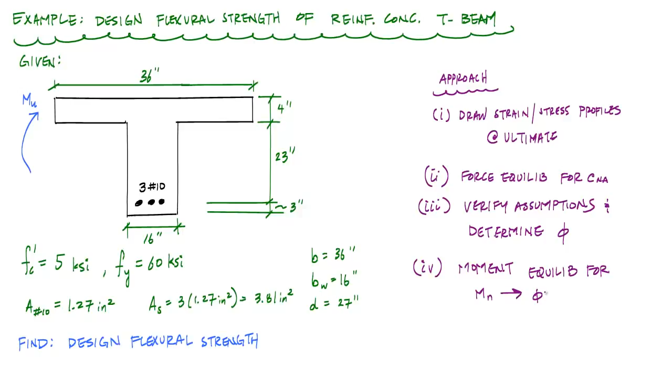So the first thing that we want to do is draw the strain and stress profiles at ultimate for the reinforced concrete section. For the T-beam, I've redrawn it right here. I like to draw horizontal lines for the top and the bottom, and these vertical lines here. The first vertical line will represent my strain profile, and the second one will be my stress slash force profile.

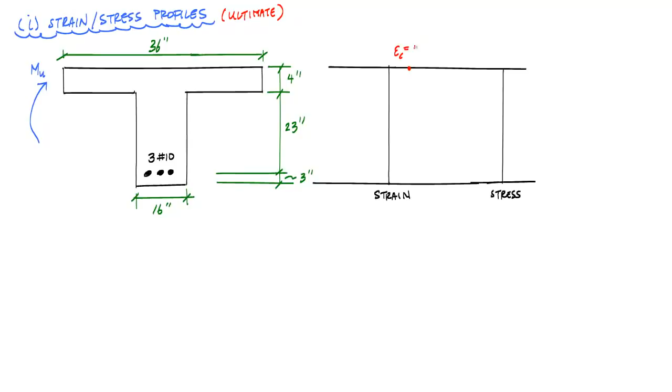But the thing to remember is that you are drawing this strain and stress profile at ultimate. This word ultimate implies a specific strain value for the compressive strain. In this case, the concrete is crushing, which means the compressive strain in concrete reaches the ultimate compressive strain. If you're using the American Concrete Institute standard, this is 0.003 in compression.

Here I will have a linear strain profile, and that linear strain profile is always true. When we draw this line out for the strain profile, we're going to assume for now that the neutral axis, more like the depth of the equivalent stress block that we're going to use for the stress profile, is within the flange. And here's what the strain profile might look like.

Where it's equal to 0 is where my neutral axis location is. This would be c, and my steel strain would be here, epsilon s. This would be my strain in the tensile steel right here, and that's something that we need to figure out.

And the stress profile looks like this. If we're using the equivalent stress block, or the Whitney stress block, I'm going to have a stress block that goes here, down to a distance a, here, and here.

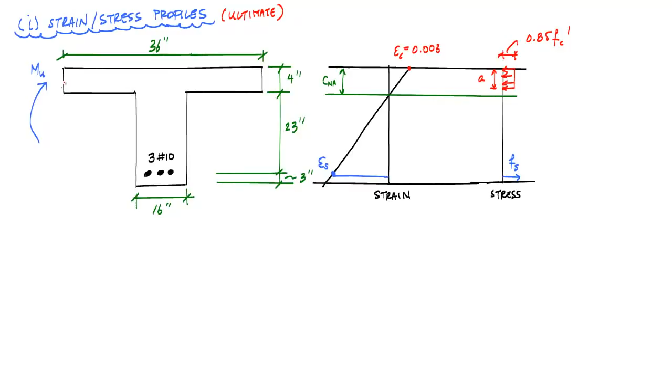This has a stress intensity of 0.85 f'c, and my steel, represented by the layer of steel location here, will have a stress over here of fs. And you know what this depth a means, the depth of the equivalent stress block: my neutral axis is shallow enough that my equivalent stress block depth stays within the flange region right here. And so this, I'm assuming right now, is my area in compression.

This has a resultant force, I'll call that Cc, and the steel has a resultant force, I'll call that Ts, in tension here. And there will be a centroid of this compression block, which will be this distance here, we'll call that y-bar, and the distance between the tension and the compression forces, the couple, I'll call z. That's just another symbol for the arm right there. And really this comes out to d minus y-bar.

I would like to emphasize to you that this drawing assumes that the depth of the equivalent stress block a is less than the height of the flange of 4 inches, and so we have this nice rectangular compression zone. If this turns out to be not true, we're going to have to redo the formulation and probably modify this drawing a little bit to reflect what's really going on.

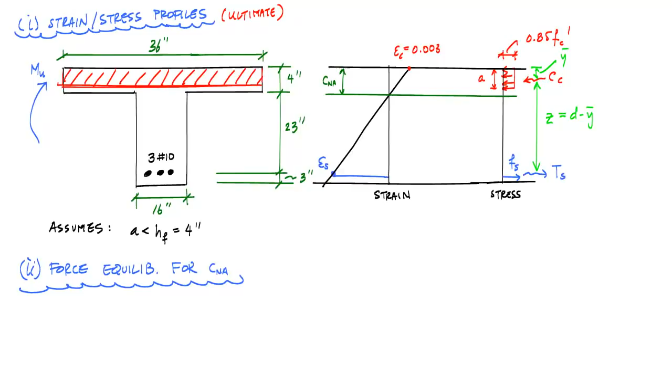So the next thing I want to do is utilize my force equilibrium equation to determine the neutral axis depth, c and a. The way I'm going to do that is take the sum of the horizontal forces equal to 0, and that tells me that Ts is equal to Cc. And if I assume that the strain in my tension steel has yielded, I can substitute and have that Ts, As fy, is equal to 0.85 times f'c times the area in compression.

And so here I can solve for the area in compression, which is going to be equal to As fy over 0.85 f'c. If I substitute some numbers, that's 3.81 inches squared times 60 ksi divided by 0.85 times 5 ksi. And that tells me that the area in compression is 53.788 inches squared.

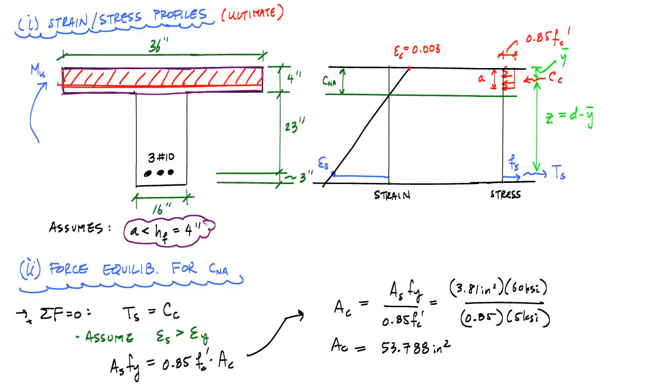As long as this area in compression that I need is less than the area of the flange, which I'll put in purple here, the geometry of the flange of this T-beam, then this assumption is true. If I calculate the area of the flange, that would be 36 times 4 inches, which is 144 inches squared. That means Ac is less than A flange, so my area in compression is this red zone. It still stays as a rectangular block.

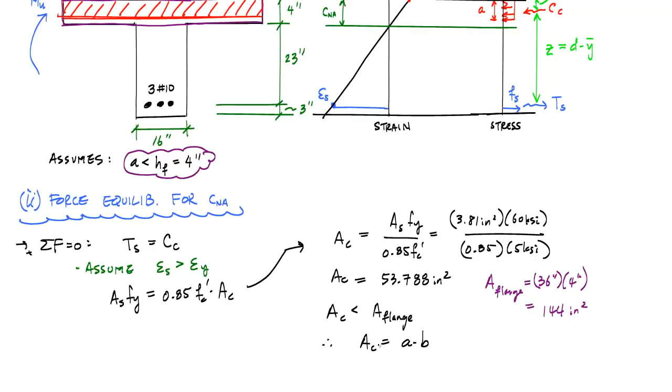And so I can say, because the area of compression is less than the area of the flange, the area in compression Ac is equal to a times b, where a is the depth of the Whitney stress block and b is the width of the flange. And I can solve for a directly now. Let me scroll down a little bit. a is equal to Ac divided by b, which is 53.788 inches squared divided by the flange width of 36 inches, and that tells me a, the depth of the equivalent stress block, is

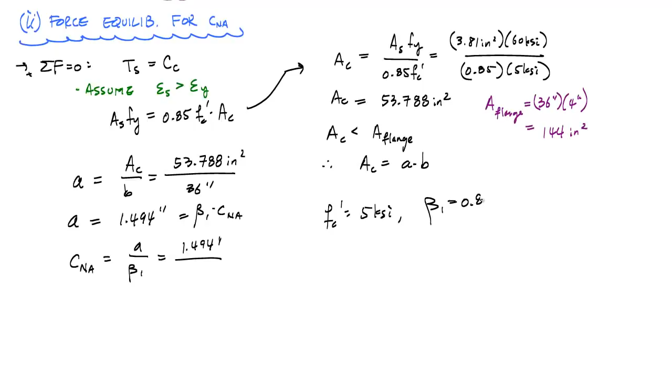1.494 inches. And then I can back calculate, because I know a is equal to beta 1 times c_NA. I can solve for c_NA, the neutral axis depth, which is a over beta 1, so 1.494 inches divided by beta 1. In this case, because f'c is equal to 5 ksi, beta 1 is equal to 0.80. And this gives me a neutral axis depth of 1.868 inches. Now the next thing I want to do is verify my assumptions.

I went ahead and I verified that the depth of the equivalent stress block is less than this 4 inches, which was the height of the flange. But I have this other assumption here that I have yet to verify, and that's the tension steel has yielded.

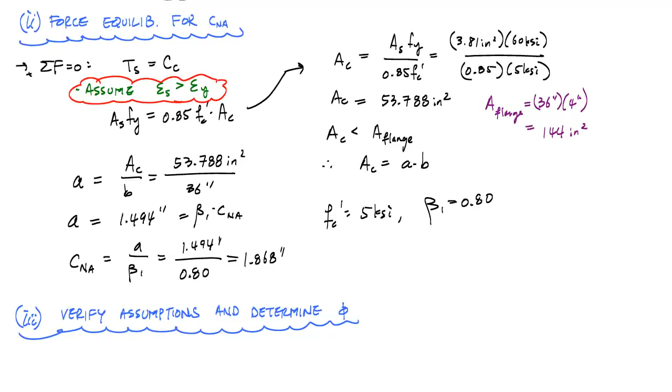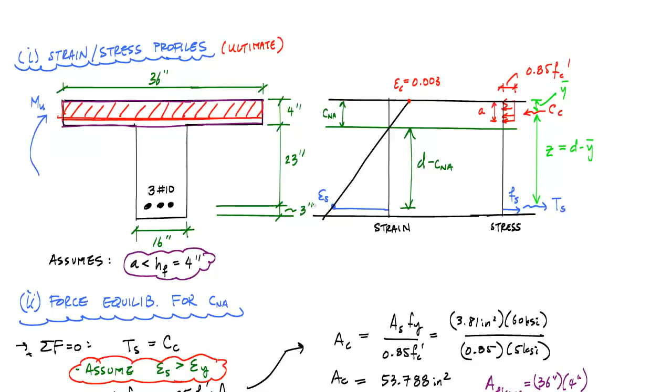And so in order for me to do that, I can just go ahead and use similar triangles from the strain profile, which if you look over here, to calculate the strain right here, I would just have that this distance right here is d minus CNA. And by using similar triangles, I can come up with a relationship for the strain here as a function of the geometry and the strain in compression.

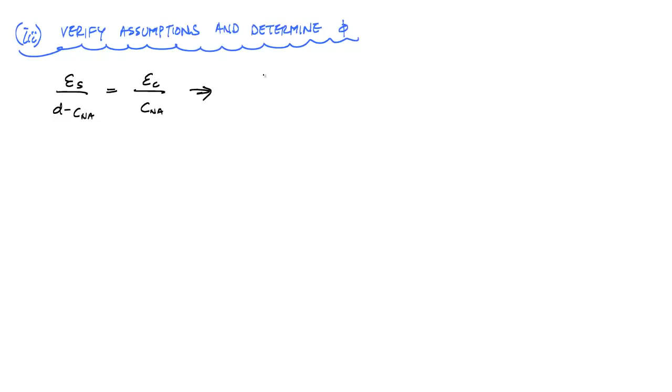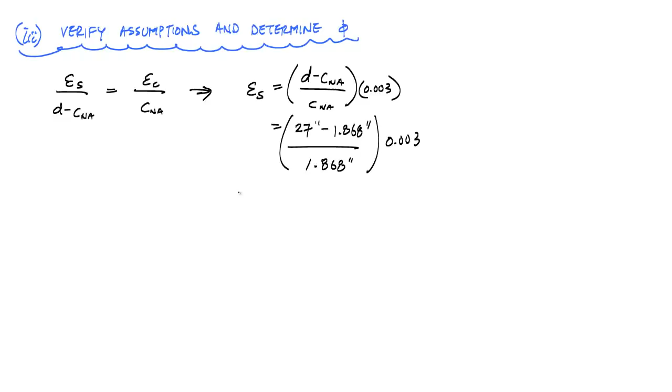So that relationship by similar triangles is epsilon s over d minus CNA is equal to epsilon c over CNA. And this whole thing just becomes that epsilon s is d minus CNA over CNA times 0.003. And if I substitute some numbers, I have 27 inches minus 1.868 inches divided by 1.868 inches times 0.003, and that tells me epsilon s is equal to 0.04.

Now this number is much greater than epsilon y, and this number is greater than 0.005, which according to the ACI code means this is a tension controlled beam, and by that phi is equal to 0.9. And this is in ACI chapter 9. This is from ACI chapter 9 if you're interested in looking that up.

And you'll see there a diagram that looks like this, and there'll be a phi value and epsilon t, which is just another way to say the extreme tensile fiber, and here this will be 0.005, and we are in this zone, which is the tension control zone, and this is 0.9 right here.

Okay, but anyways, you can see some other videos and whatever that'll be all there, you know. And this is something you got to know, right? You just got to know it. You know, the reality is you just got to be able to look it up. All right, don't be weak.

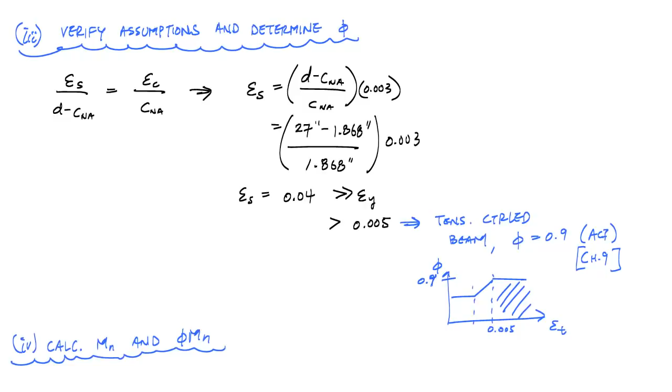So we verified that the steel yielded, and now the next thing that we can do is calculate the nominal moment. And to do that, there's no memorizing equations here. You just go back and look at that stress profile again, right here, to calculate the nominal moment. I look over here at the stress profile. I realize that my area in compression stays within the flange, so it's a nice little rectangle.

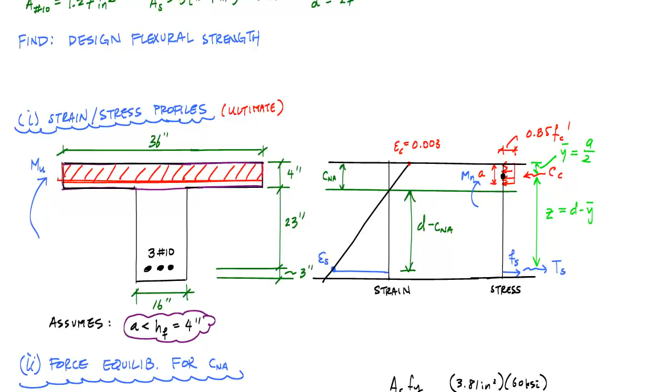So that means the depth of my equivalent stress block, the depth of the resultant C sub C, this is just a over 2. And so if I sum moments, and I like to draw this little Mn here, if I sum moments about any point, and it's conventional to take moments about where the C sub C is, then I can solve for this M sub n right here. So let me show you what that equation might look like here.

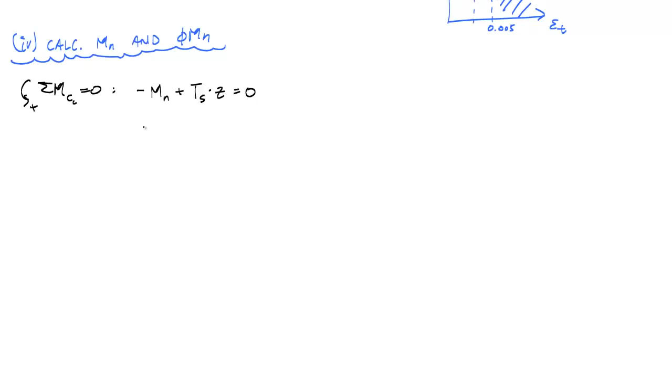If I sum moments about C sub C equal to 0, and I say this is positive, I'll get an equation that actually looks like this: minus Mn plus Ts times z equals 0. And that just tells me that Mn is Ts times z. And because the steel is yielded, this is As fy. z is d minus y bar. And because my equivalent stress block and the area in compression is still a rectangle, this y bar is just a over 2. And now all I got to do is substitute here.

As was 3.81 inches squared. The yield strength of steel in this problem was 60 ksi. d was 27 inches minus a over 2, which is 1.494 inches divided by 2. And I plug and chug. Let's convert this into kip feet. So 1 foot every 12 inches. And this number becomes 500.12 kip feet, right? And it ain't no thing, man.

You just multiply it by phi to get the design moment strength, phi Mn. That's 0.9 times this 500.12 kip feet. And here, this is 450.11 kip feet. And gosh, you know, I think this is as deep or as challenging as the FE exam might get. And, you know, you can do it.